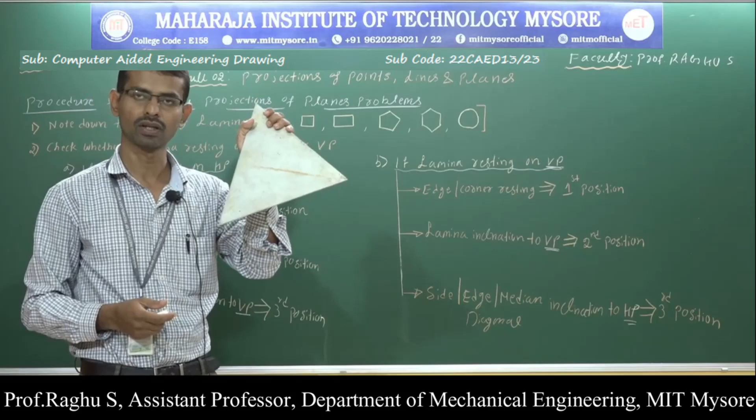So first note down the type of the lamina. The lamina may be triangle, rectangle, square, pentagon, hexagon or circular. After that, check whether the lamina is resting on the horizontal plane or vertical plane. If the lamina is resting on the horizontal plane, start the first position with the top view. If the lamina is resting on the vertical plane, start the first position with the front view.

Now, to draw the three positions, first note down the edge or corner resting condition; it is used for drawing the first position. When the lamina is resting on HP, the lamina inclination with respect to HP is used for drawing the second position. Then the side or edge inclination with respect to VP is used for drawing the third position.

When the lamina is resting on VP, the edge or corner resting condition is used for drawing the first position front view. When the lamina is resting on HP, the edge or corner resting condition is used for drawing the first position top view. When the lamina is resting on VP, the edge or corner condition is used for drawing the first position front view.

So next one. When the lamina is resting on VP, note down the lamina inclination with respect to VP. It is used for drawing the second position. Next, note down the side or edge inclination, median inclination with respect to HP. It is used for drawing the third position.

Now let us discuss how to draw the different positions. First one: when the lamina is resting on HP, first note down the edge or corner resting condition. Next, note down the lamina inclination. Next, note down the side or edge inclination. Now, to draw the first position, I just need whether the lamina is resting on edge condition or corner condition.

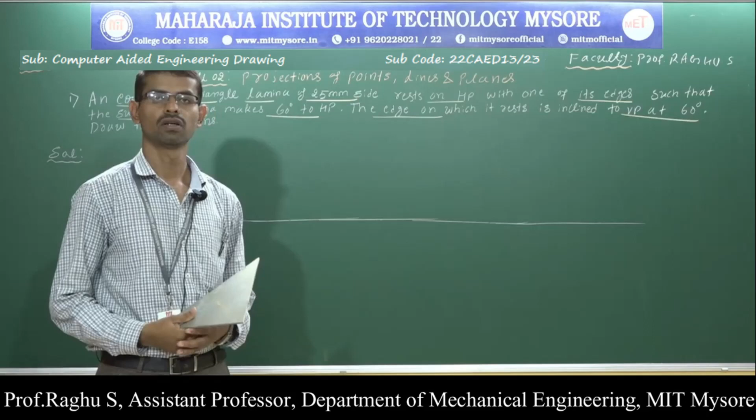When the lamina is resting on VP, to draw the third position, take HP inclination. When the lamina is resting on HP, to draw the third position, take VP inclination. So this is the procedure for solving the projections of planes when the lamina is resting on HP and when the lamina is resting on VP. Now let us discuss some problems related to projections of planes.

The first problem: an equilateral triangular lamina of 25 mm side rests on HP with one of its edges such that the surface of the lamina is inclined to HP at 60 degrees. The edge on which it rests is inclined to VP at 60 degrees. Draw the projections. Draw the projections means we are supposed to draw the front view and top views of the lamina.

Already we have discussed the various positions of planes, like a plane parallel to one of the reference planes and perpendicular to another reference plane. When the plane is parallel to one reference plane and perpendicular to the other, I will get the solution in a single position. Suppose the plane is parallel to HP and perpendicular to VP; here this triangle lamina is parallel to the horizontal plane and perpendicular to the vertical plane. The solution for this position I will get in only one position.

Next, suppose the lamina is inclined to the horizontal plane and perpendicular to the vertical plane; the solution for this position I will get in two positions. When the lamina is inclined to HP and perpendicular to VP, or inclined to VP and perpendicular to HP, the solution will be obtained in two positions. When the lamina is parallel to any one plane and perpendicular to another, the solution will be obtained in a single position.

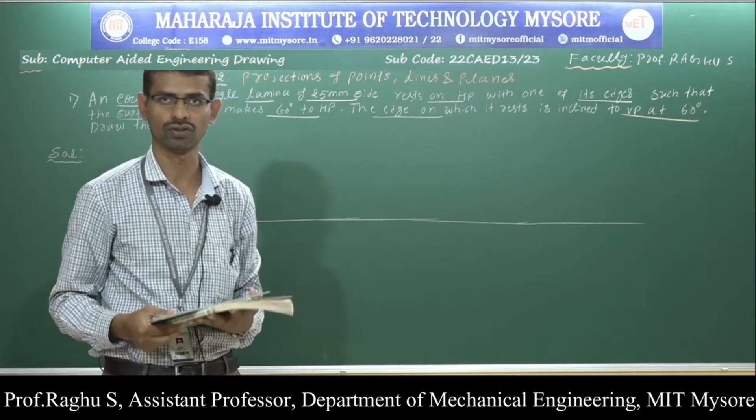Suppose the lamina makes inclination with respect to the horizontal plane. Assume this is the horizontal plane. Here the lamina is inclined to HP and perpendicular to VP; the solution will be obtained in two positions. Now, when the lamina is inclined to HP and at the same time the resting side is inclined to VP, or when the lamina is inclined to VP and the resting side is inclined to HP, the solution will be obtained in three positions. The three positions are: first, the resting position; second, lamina inclination; and third, edge inclination, corner inclination, median inclination, or side inclination.

Already we have discussed the procedure. First, note down the type of lamina given in the problem. Here the lamina is an equilateral triangle. Equilateral triangle means all sides are equal and all angles are equal, so the interior angles are 60 degrees. Therefore the given lamina is an equilateral triangle of side 25 mm. So the first point is clear. Next, let us move on.

The lamina rests on HP with one of its sides or edges. Next, check whether the lamina is resting on HP or VP. In the problem it is clearly mentioned that the lamina is resting on HP. Say this is the horizontal plane. Now there are only two possibilities: the lamina resting on an edge or resting on a corner. This is the corner resting condition on HP, and this is the side or edge resting condition. The problem says the lamina rests on HP with one of its edges, so this is the position.

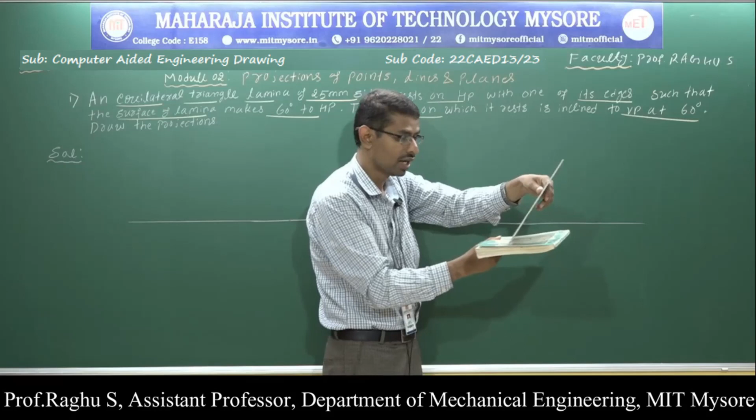First, the lamina rests on HP on one side. Next, the lamina is inclined to HP at 60 degrees. This is the entire surface inclination. Next, this resting side is inclined to VP at 60 degrees. Now this is the actual position of the lamina.

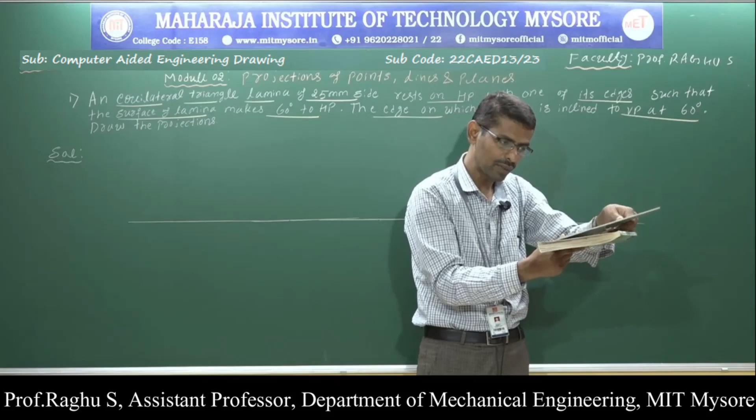In this position I am supposed to write the top view and front view, but I cannot do that here because I will not get the true shape. So first, place the lamina completely on HP like this, ignoring all inclinations - ignore the 60 degree inclination with respect to VP and the 60 degree inclination with respect to HP.

Now the lamina is resting on HP. Observe the lamina from the top and from the front. In which view will I see the complete shape? In the top view, I can see the true shape.

So what is the top view? The top view is the triangular lamina. Now to draw the first position, just observe the edge inclination - edge resting condition or corner resting condition.

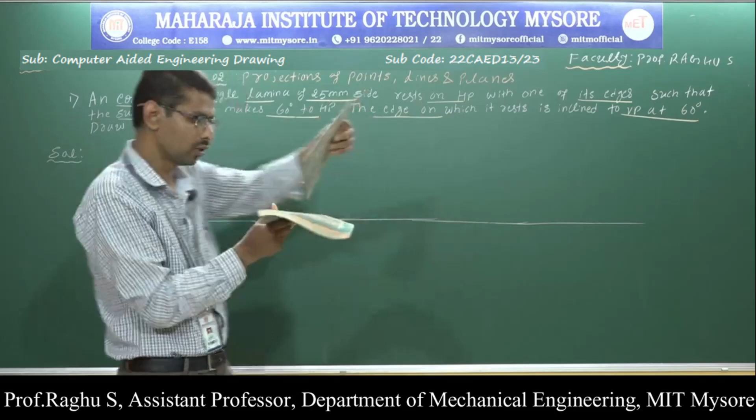Here the lamina rests on HP on one of its sides. Therefore, place the lamina on HP such that the resting side comes towards the left side. If you place it so the resting corner comes towards the left, that is the corner resting condition. But the problem states the lamina rests on HP with one of its side, so you should place the lamina like this, not like the corner resting version - the resting side should come towards your left side.

Now draw the top view and front view, ignoring all inclinations. I should start the first position with the top view because there I can see the true shape. So where should I get the top view? I will get the top view on HP.

First draw the XY line. Next, since this is first angle projection - all planes problems are solved in first angle projection - draw VP and HP. For all problems you are supposed to mention VP and HP. Now construct the triangular lamina.

How do I construct a triangular lamina? Here the given side is towards the left side - the edge should come towards the left. Construct a triangular lamina of 25 mm side.

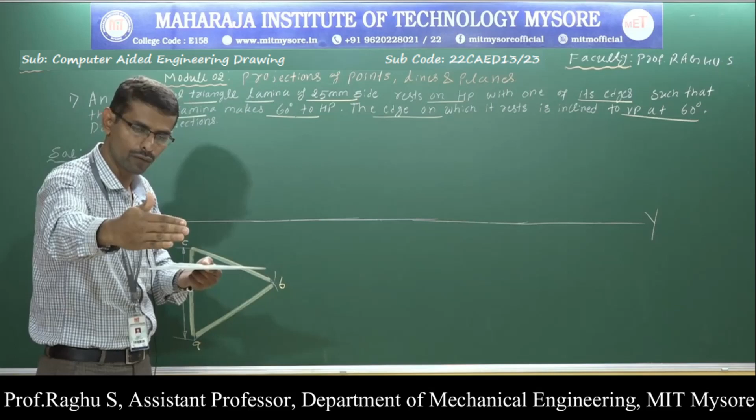Next, to get the front view - the front view is a straight line. Since the lamina rests on HP like this, when you observe from the front of the object, the lamina looks like a straight line, whereas in the top view the lamina looks like a triangle shape.

Now to get the front view, just draw a thin line up to the XY line. The gap between these two lines represents the front view, and the view must be dark. So this is the front view.

So the triangle lamina appears as a straight line in the front view. The front view comes on the XY line.

Now, naming. This is the direction of view. So which corners are visible? Corner A visible, corner B visible. So this is A, front view denoted by A dash, therefore A dash visible, and this is B dash. This line is coming from B, therefore this is B dash.

And here I have point C just behind point A. C is invisible because it is just behind point A. Therefore invisible corners are indicated in the bracket.

Front view naming: A dash visible in the front view. Here this line is coming from A and C. Therefore A visible, B visible. But here point C is behind point A, therefore it is invisible. Invisible points are indicated in the bracket.

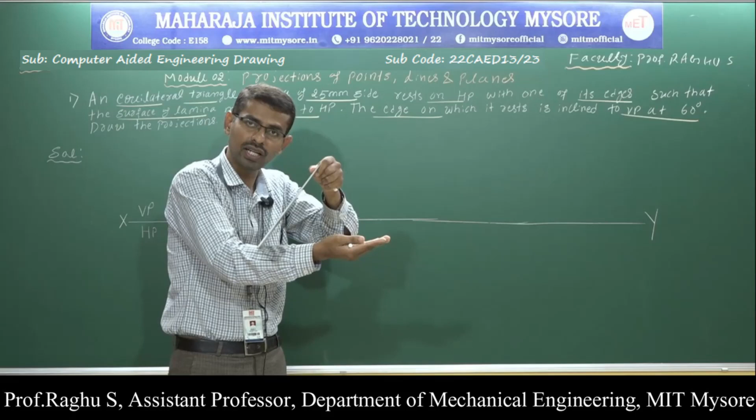So to draw the second position, what is the procedure? First draw a line at 60 degree inclination for the front view, since in the front view I will see the inclination. So draw a 60 degree line. Take any point, draw a thin line at 60 degrees, denoted by theta with respect to HP. This 60 degree angle is visible in the front view.

For example, assume this is a triangle lamina. When the lamina inclines with respect to HP, this entire inclination will be visible in the front view. I have written the front view inclination. Now take a 60 degree angle and draw a very thin line.

Next, measure this dimension, the front view length, using this compass. Next, cut an arc. Now make it dark, since it is also a view, the front view. So make it dark.

Now this is point B dash, and here we have point A dash and point C dash. I have completed this second position front view. Observe here, this is the left side, this is the right side. In the planes, I have assumed that the left side is the resting condition, with the AC edge resting on HP.

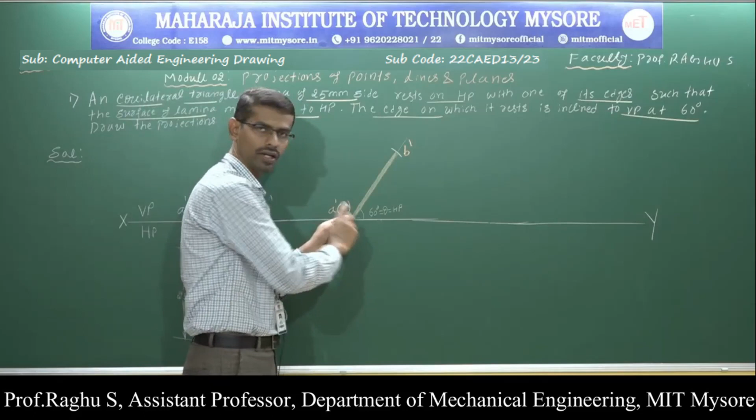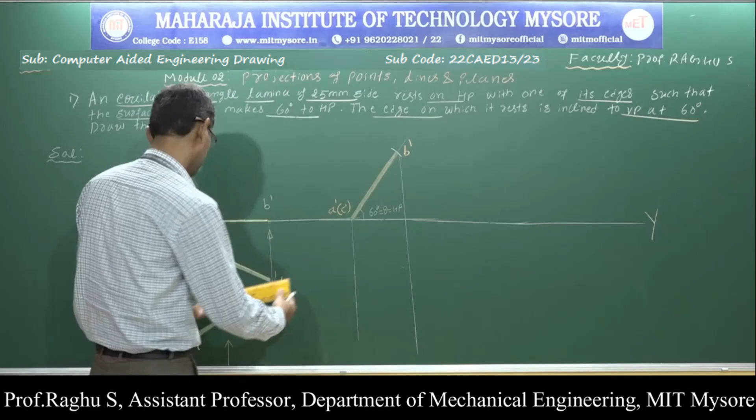Next, to get the top view, just draw projection lines, meaning thin lines. Draw projection lines from the second position front view. At the same time, draw projection lines from all three corners of the first position top view. I have drawn projection lines from the first position top view and second position front view.

Next, do the naming. Naming is done by taking the intersection of horizontal projections and vertical projections. Observe here, this is the vertical projection, this line is coming from point B. Now observe the horizontal projection of point B, and this is the vertical projection of point B. These two lines intersect at this point, therefore this is point B.

Or corner B. Similarly, find the horizontal projection of point A and vertical projection of point A, horizontal projection of point C and vertical projection of point C. This is the horizontal projection of point C. Where is the vertical projection of point C? This is the vertical projection of point C, therefore this is point C or corner C. Now this is the horizontal projection of point A and this is the vertical projection of point A, so here I will get point A.

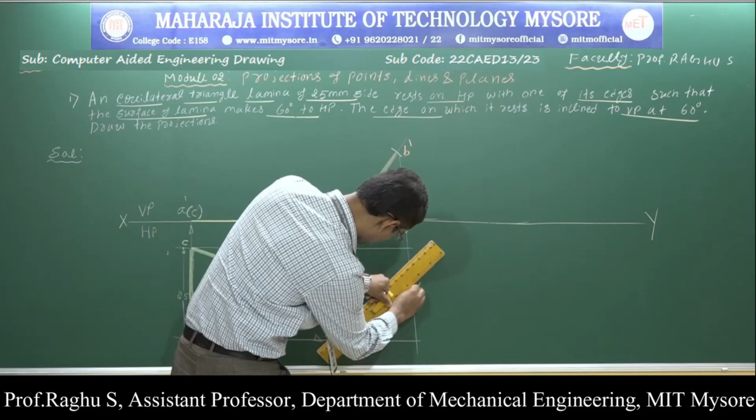Now, connect all three corners to get the triangle lamina. So, using dark lines, connect all three corners.

Now I have completed the second position, top view. Next, the last one. To draw the third position, I need VP inclination. VP inclination means the edge on which it rests is inclined 60 degrees with respect to VP.

Now, here I have three sides: the edge AB, the edge BC, the edge AC. Out of three sides, which one is the resting side? Already I told you, the side which is on the left side is considered as the resting side.

You can observe here also, so which one is the resting side here? This side AC is resting. Therefore, AC is the resting side - the side towards your left side is the resting side.

So in the problem, he has mentioned the side or edge on which it rests. This is the resting side, and this resting side is inclined 60 degrees with respect to VP. VP inclination means below the XY line, so VP inclinations are visible in the top view.

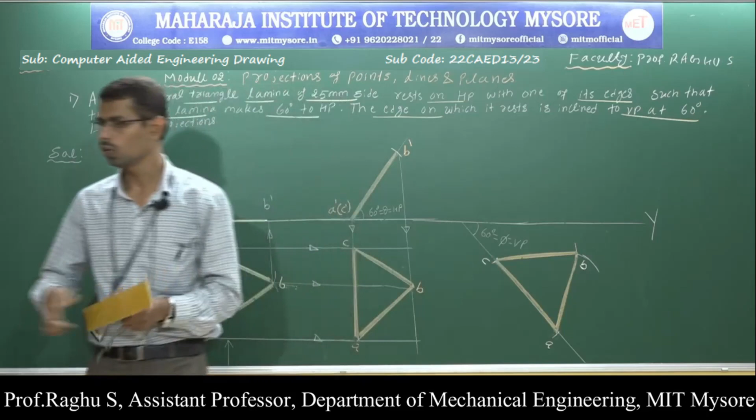Now the last one. To draw the last position front view, just draw the projections - projection lines, meaning thin lines. Just draw the projection lines. It comes on the XY line only.

Next, draw projection lines from point C, from point B, and from point A. Draw vertical upward projections from all the corners, and horizontal projections.

Now look at the vertical projections and horizontal projections. Here this is the vertical projection of point B - where is the horizontal projection of point B? This is the horizontal projection. These two lines intersect at this point, therefore this is point B dash.

Similarly, identify point A and point C by considering the vertical and horizontal projections. This is the vertical projection of point A, this is the horizontal projection of point A, so this is point A dash. This is the vertical projection of point C, this is the horizontal projection of point C, and this is point C dash.

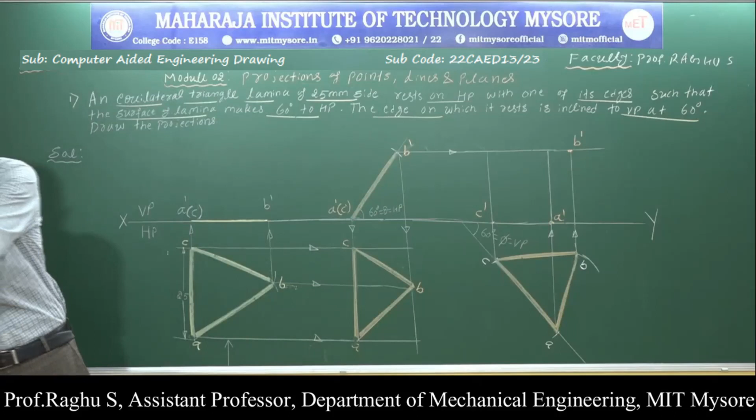Now connect A, B, C to get the final view. Connect A to B - this is point A dash. Connect A to B using dark lines, connect A to C, and connect B to C.

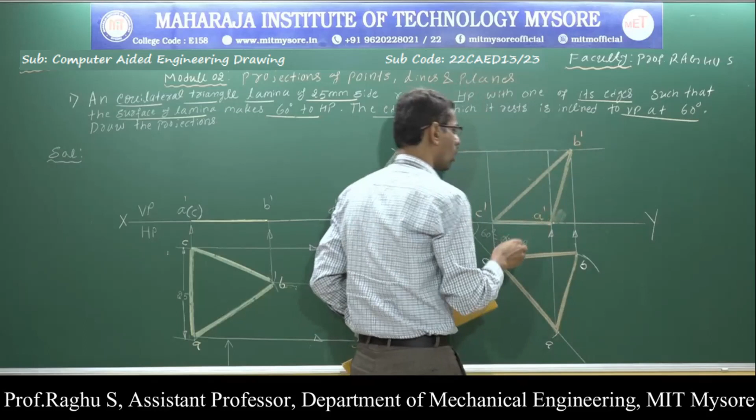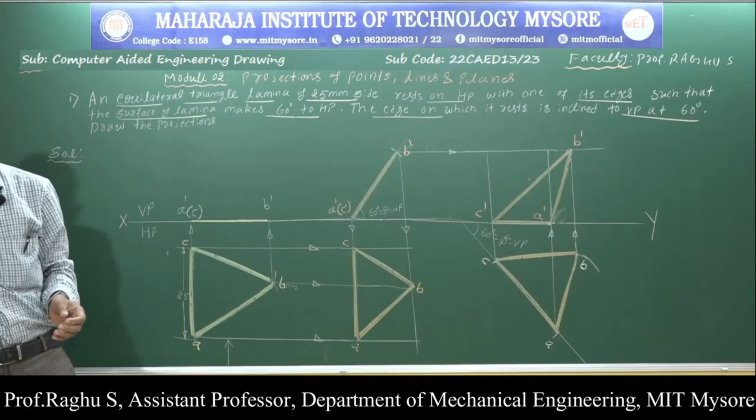So this is the final position of the triangular lamina - the actual position when the lamina inclines 60 degrees with respect to HP, and the side on which it rests inclines 60 degrees with respect to VP.

So you can verify the problem also. Here the side on which it rests, that is AC, the resting side, should come in the final view also. So first take the resting condition to draw the first position.

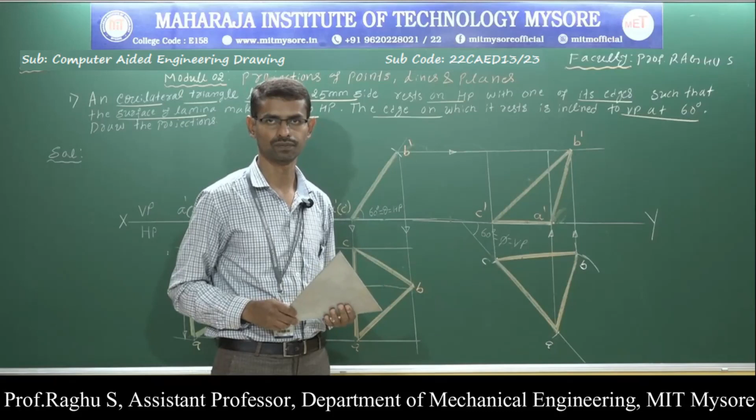Next, take the lamina inclination. Why should I take the lamina inclination in the second position? Because the lamina is resting on HP. When the lamina is resting on HP, take HP inclination to draw the second position, and to draw the third position, take VP inclination. Remember, for all problems, when the lamina rests on HP, take lamina inclination - that is, HP inclination - to draw the second position, and take VP inclination to draw the third position. So this is the solution for this problem.